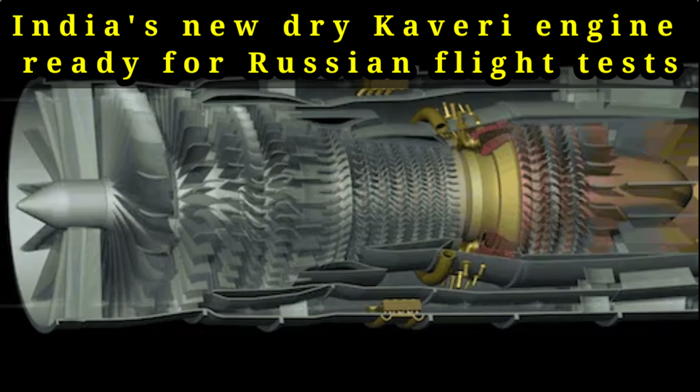India's new Dry Kaveri engine is planned to be ready for Russian flight tests by 2025. It is a state-of-the-art engine developed by India's Defence Research and Development Organization, DRDO.

It is primarily aimed at providing indigenous technology for advanced fighter aircraft and platforms like UAVs, unmanned aerial vehicles. This engine works without afterburner, making it suitable for light fighters and UAVs. It has been designed and manufactured in India.

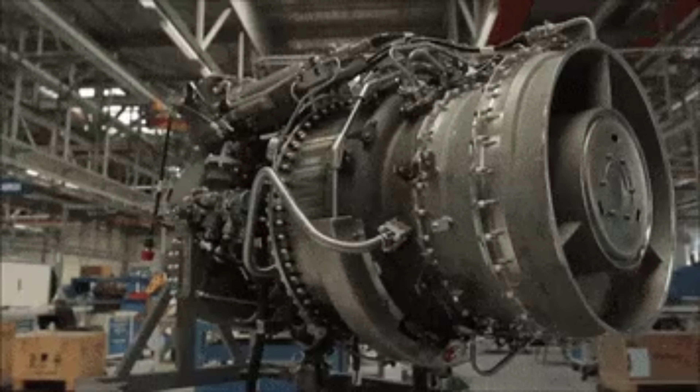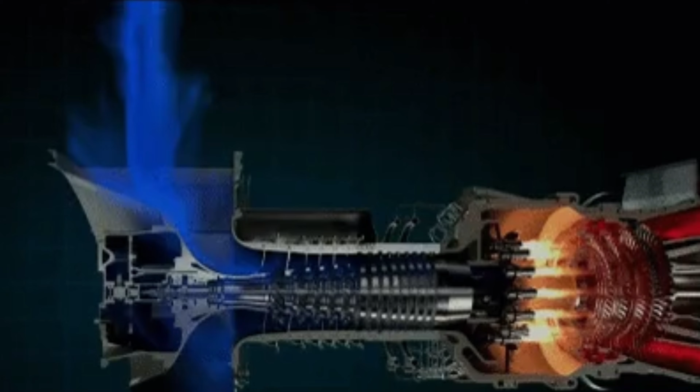In 2025, the engine will be flight tested in Russia, where it will be tested in various conditions at state-of-the-art facilities. The Dry Kaveri engine is equipped with state-of-the-art technologies, which provide it with enhanced performance, fuel efficiency, and low maintenance. This engine is capable of providing thrust up to 46 to 50 kilonewtons.

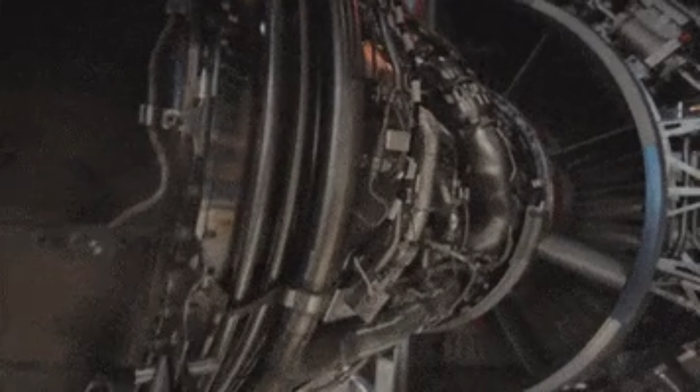This engine is being developed under India's Atmanirbhar Bharat, Make in India initiative. It aims to make India self-reliant in the defense sector and reduce foreign technological dependence.

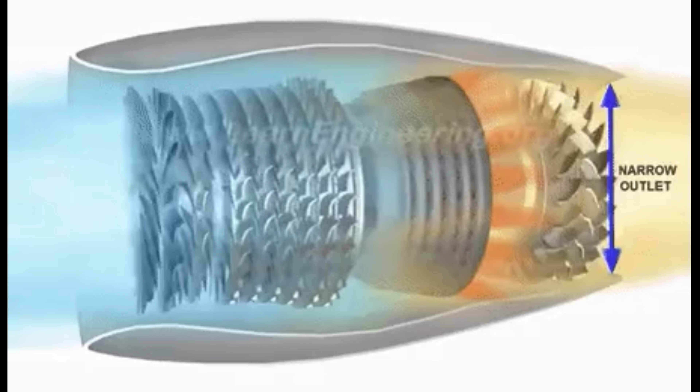The Kaveri engine project was started in the 1980s, but it faced several technical and financial hurdles. The development of Dry Kaveri is an attempt to give a new direction to this project.

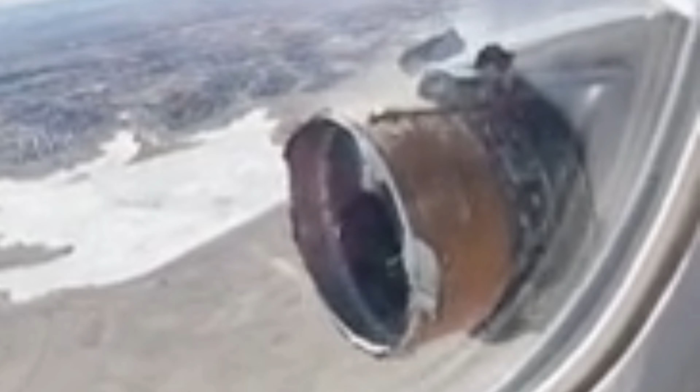After testing in Russia in 2025, this engine could set new milestones in India's aviation sector. This will significantly enhance India's defense and aerospace capabilities. Let's discuss some more aspects to understand more details about the Dry Kaveri engine and its importance.

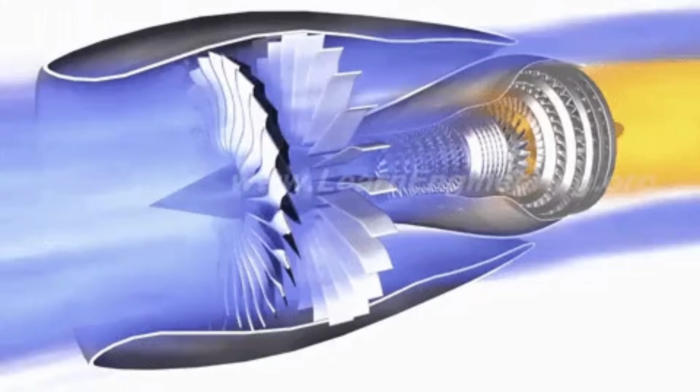The development project of the Kaveri engine began in the 1980s by the Gas Turbine Research Establishment of DRDO. Its basic objective was to develop an indigenous engine for India's Tejas fighter aircraft. High technical complexity, lack of financial resources, and lack of technical expertise delayed the project.

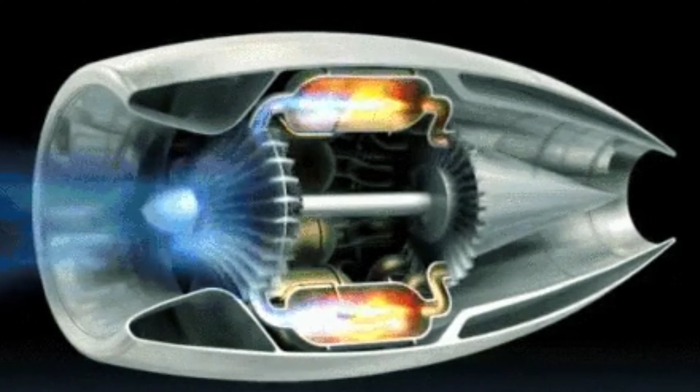The dry version of the Kaveri engine has been designed without an afterburner, making it ideal for light aircraft and UAVs. It provides a thrust of 46 to 50 kilonewtons, which is enough for light fighters and unmanned aircraft.

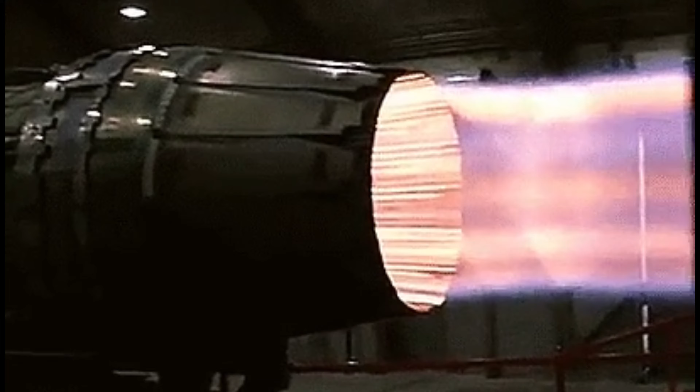This engine is excellent in fuel efficiency and is capable of performing for a long time. Its design is simple and durable, reducing maintenance costs.

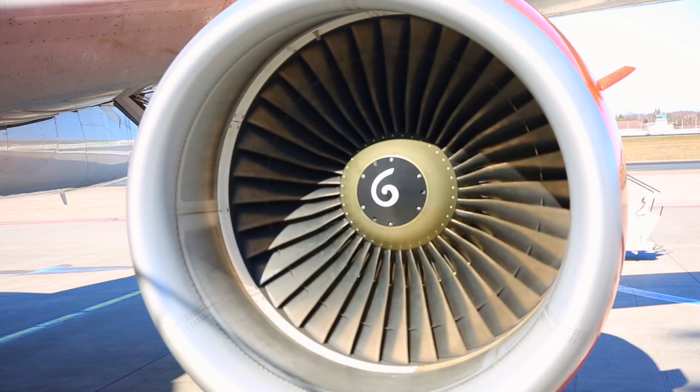Now let's talk about why the tests in Russia itself. Russia has advanced test facilities, which will be used to assess the reliability and performance of the Kaveri engine. Russia has state-of-the-art technological platforms for aircraft engine testing, which will help optimize testing time and cost for India.

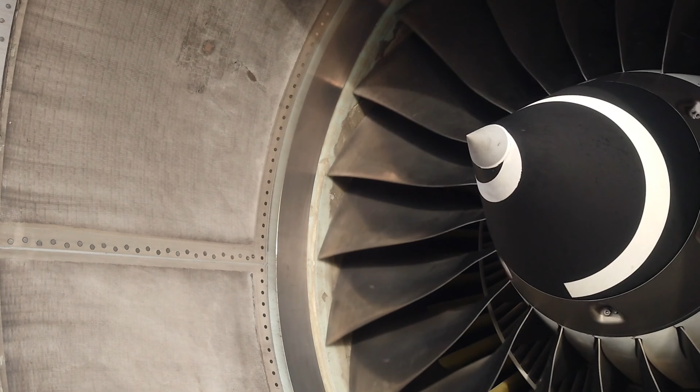What is the strategic importance of this project? The Dry Kaveri engine will strengthen India's indigenous defense capabilities. This technology can be used by India to export engines to other countries in the future. This engine can play a major role for modern UAVs such as the Ghatak stealth drone.

With the development of the Dry Kaveri engine, India can join the list of countries that have the manufacturing capacity of aircraft engines. Currently, the countries that master this technology are US, Pratt & Whitney, GE Aviation; Russia, Klimov, Saturn; France, Safran; UK, Rolls-Royce. The Dry Kaveri engine can power indigenous platforms like Tejas and Ghatak.

The project will also help India move towards hybrid and electric engine technologies. The Dry Kaveri engine could prove to be a game-changer for India.

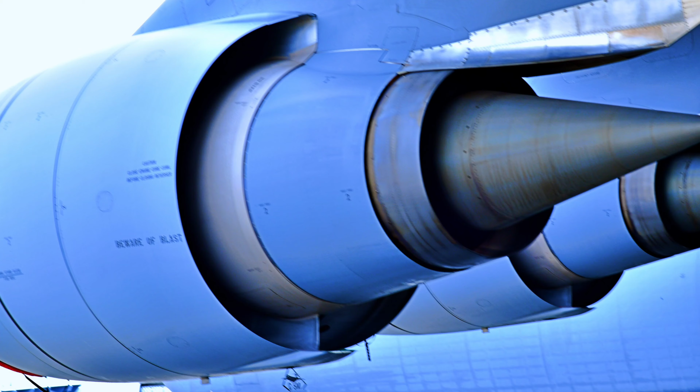This is not just a technological achievement, but a major step towards self-reliance, national security, and strengthening India's position at the international level. Its successful tests after 2025 will take India to new heights in the defense and aerospace sector.

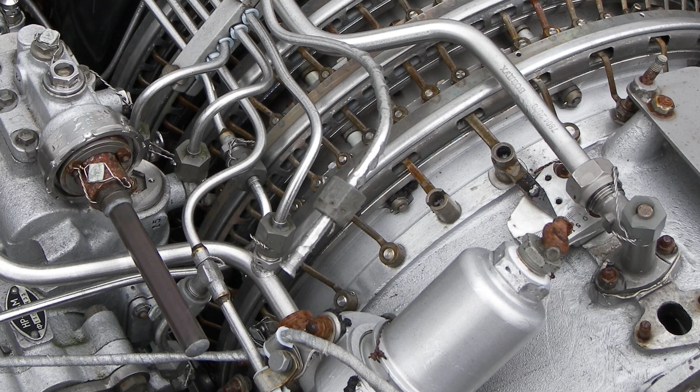The following state-of-the-art technologies have been used to develop the Dry Kaveri engine. Flame tube design: the engine uses a highly efficient combustion chamber, which generates maximum energy with minimum fuel consumption. High-temperature materials: engine parts are made from titanium and nickel-based super alloys, which can withstand high temperatures and pressures.

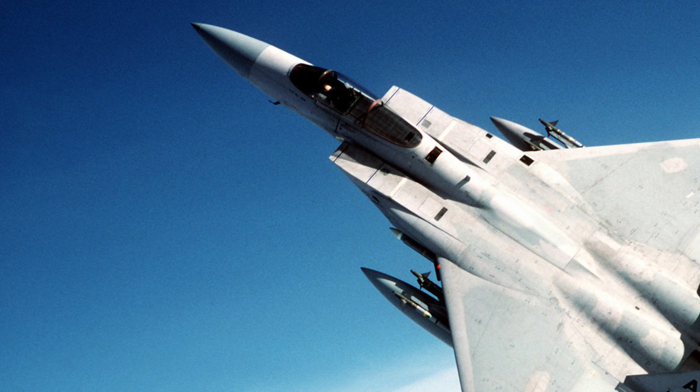Blade cooling technology: the turbine blade has an advanced cooling system, which ensures high performance for a long time. Digital control system: this engine has FADEC, Full Authority Digital Engine Control System, which arranges the engine in an accurate and efficient manner.

The Dry Kaveri engine is not limited to fighter aircraft, but it can have many other uses.

This engine is highly suitable for future advanced drones, such as stealth drones and long-range UAVs. This technology can also be used in small satellite launch vehicles, SSLVs, and other aerospace projects. If made more advanced, it can be used in light passenger aircraft.

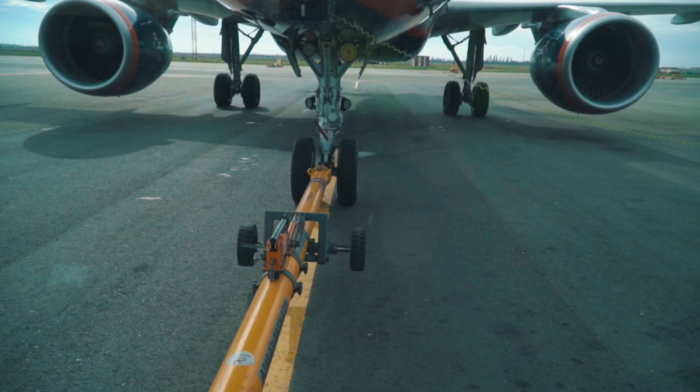What are the possibilities and international cooperation now? Relations with Russia: the long-term defense cooperation between India and Russia has given impetus to this project. The advanced testing facilities in Russia will provide a reliable platform for India's engines.

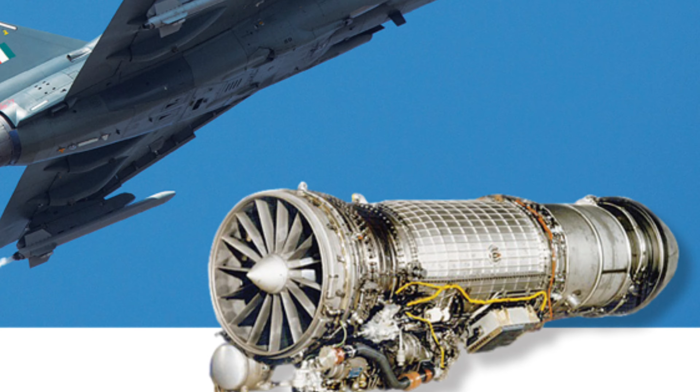Export opportunities: if Dry Kaveri is successful, India can export it to friendly countries such as South Asia, Africa, and Central Asia. New partnerships: there is also the possibility of technical collaboration from companies such as France's Safran and the US's GE Aviation, which can make it more advanced.

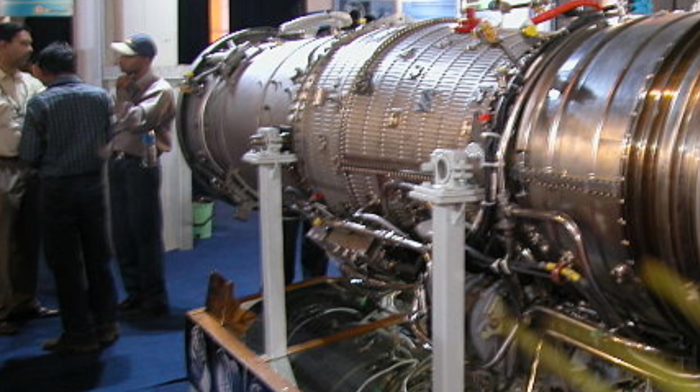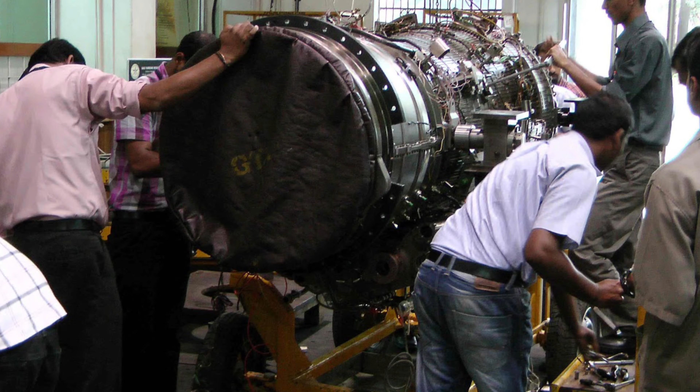The Dry Kaveri engine is a prime example of India's Atmanirbhar Bharat policy. Its successful development and deployment will provide many benefits such as reduction in foreign dependence. Currently, India has to depend on GE, US, and Rolls-Royce, UK, to buy engines for its aircraft. This engine will reduce this dependence.

Empowerment of indigenous defense industry: through engine manufacturing, India will be able to attract new jobs and investment in its defense industry. Economic savings: the huge expenditure incurred on buying foreign engines will be avoided.

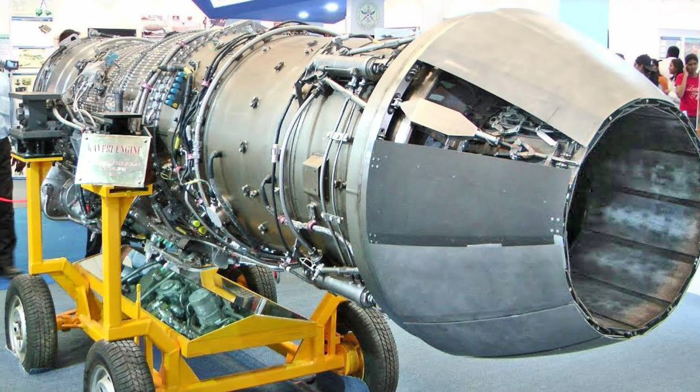What will be its role in future projects? AMCA project: the experience of Dry Kaveri will be useful in making indigenous engines for India's Advanced Medium Combat Aircraft, AMCA. Stealth drones: this engine can play a major role in India's deadly stealth drone project. Technology for multi-role aircraft: this engine can also be adapted for multi-role fighter jets in the future.

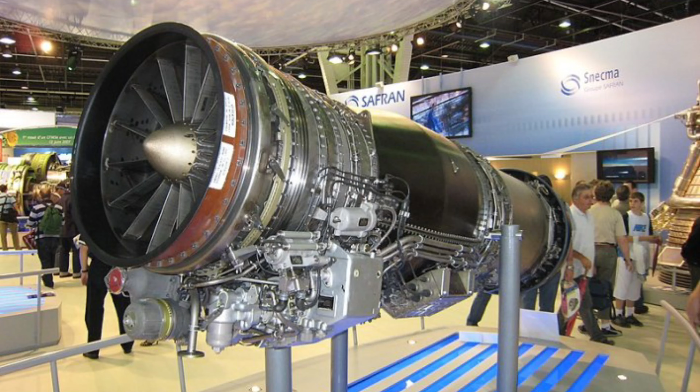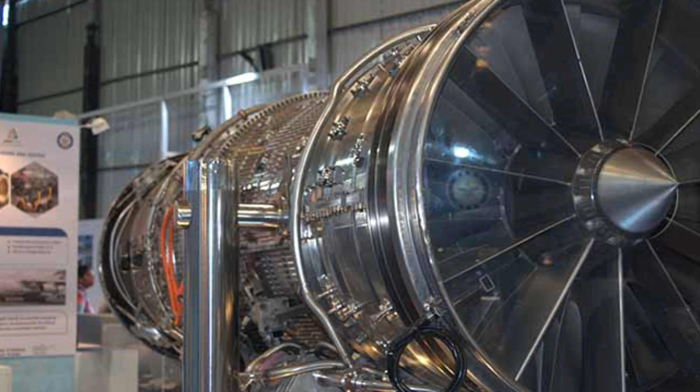While the project is very promising, it also comes with some challenges, such as meeting performance standards. Internationally, the challenge will be to make the engine competitive in reliability and performance. Long test time: the advanced testing process will require time and resources. Technological advances: new technologies have to be constantly incorporated to keep the engine relevant for decades to come.

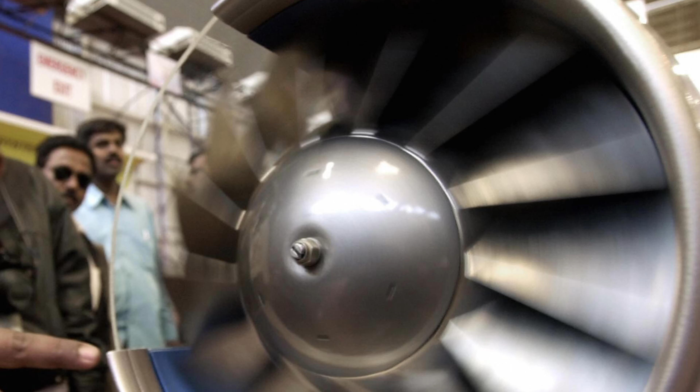The Dry Kaveri engine is not only a technological achievement for India, but it is also an important step towards self-reliance in the country's defense and aerospace sector. Its successful trial in 2025 will not only provide India self-reliance in its fighter aircraft and drones, but will also provide an opportunity to emerge as a major exporter.

In a significant development for the aerospace sector, the Gas Turbine Research Establishment in India is going to receive a new edition of the Kaveri engine, Dry Kaveri, manufactured by Godrej Aerospace by February next year. The engine will undergo significant in-flight tests using Russia's Il-76 aircraft at the Gromov Flight Research Institute, GFRI, in Moscow, Russia.

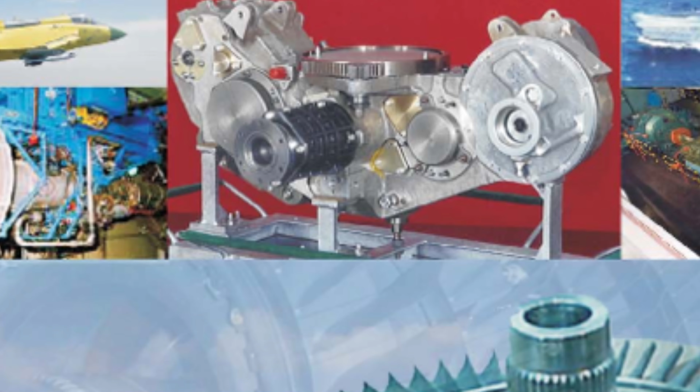This engine is an important step towards its integration into the deadly Unmanned Combat Aerial Vehicles program. Godrej Aerospace, after receiving an order to manufacture 8 modules of this engine in September 2022, has been at the forefront of this indigenous effort, showcasing India's manufacturing capabilities in high-precision aerospace components.

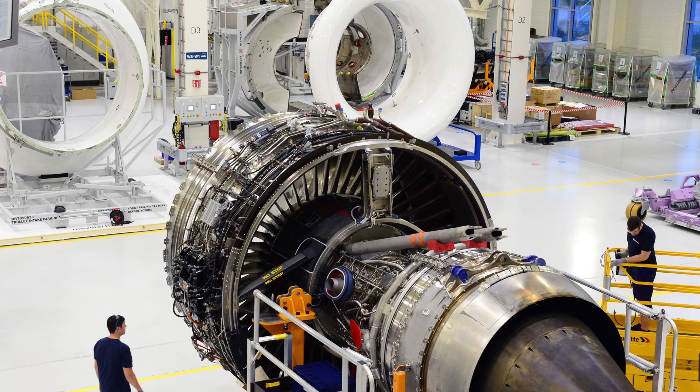After the initial ground tests to ensure basic functionality and performance, the Dry Kaveri will be taken to Russia for integration into the Il-76 aircraft. This step is important to simulate the high altitude and real flying conditions required before the engine can be certified for use in deadly UCAVs.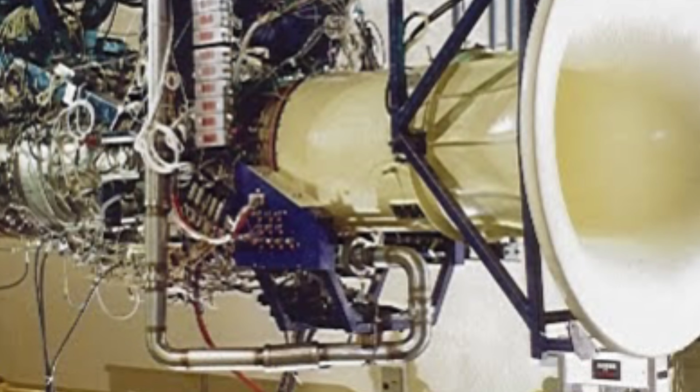The Il-76, known for its robustness and adaptability as a flight test site, will provide the platform for these tests. The integration into the Il-76 involves replacing one of its engines with a Dry Kaveri, allowing direct comparison of performance under different conditions. This approach not only tests the stamina and reliability of the engine, but also provides valuable data about how it integrates with existing aircraft systems, which is crucial for its future in the Ghatak program.

If the Dry Kaveri succeeds in these rigorous tests, it will prove to be a milestone in India's journey towards self-reliance in aero-engine technology. The data collected will be helpful in further refining the engine, ensuring that it meets the stringent requirements of modern warfare scenarios.

This can also pave the way for additional orders and potential export opportunities, which will demonstrate India's capability in this sector at the global level.